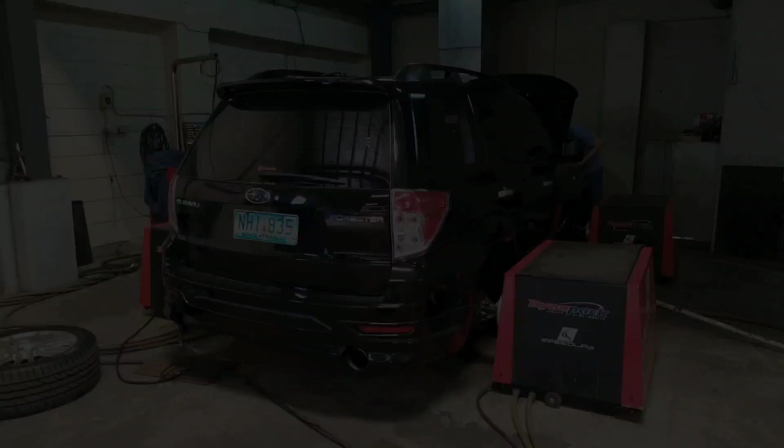We have a 2011 Forester Turbo who came in to change his turbo because his stock turbo has the blades chipped already, so he managed to find a VF52, which is from what we believe is a WRX of the same vintage. And it is a bolt-on for this engine.

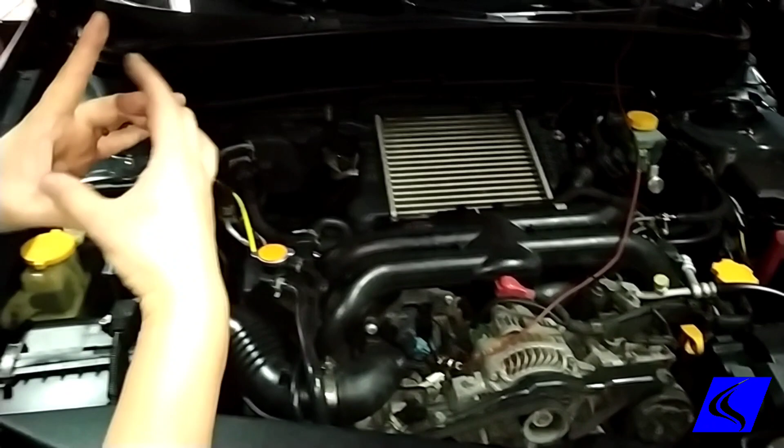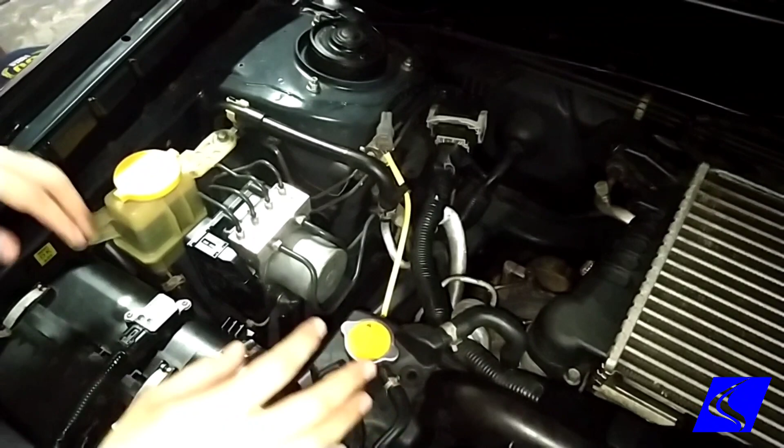Difference between his stock turbo and the VF52 is that the inlet is a little bit bigger, so it flows in more air. And despite it being a complete bolt-on, and yes, the car will run, it will work, but it's gonna be number one, too lean, and number two, tuning is all wrong because the stock computer doesn't know what to do with the extra air anymore.

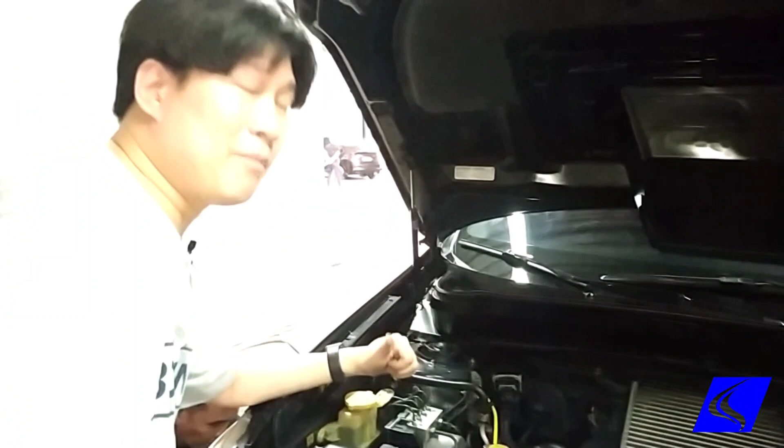This already has a full exhaust from us. I believe there's a K&N drop-in here, and then we're about to install a Unichip to be able to correct the air-fuel ratio. One of the primary reasons why we went with a Unichip is because it is a 10-year-old car. I don't think we'll be keeping it for the next 5 years even.

So when he does sell the car off, we can remove the Unichip, we can remove the exhaust, put everything back to stock, and then he can reuse the Unichip for his next car, whether it's gas or diesel. The wiring diagram for the Unichip, this is the pin-out sockets that we need for the Subaru, which we get from the Unichip website, which only us Unichip dealers have access to. And this is the plug side of the Unichip.

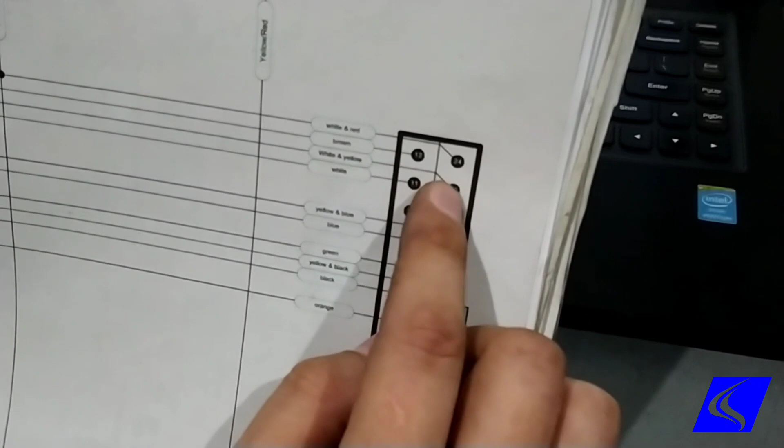A brief explanation of what these wires are. These first two are power and ground. These two are MAF sensor in and out. So this basically controls how much fuel we're gonna add. This next one is ignition timing, so plus minus, advance or retard ignition. This is the ground for the crank sensor, and this is for the throttle position, 0 to 5 volts, and this is another ground for the throttle position.

So we need a reference signal. So basically the start when it says power and ground is 0 to 12 volts. The Unichip needs power to operate. These two are terminated for the mass airflow. This one we adjust the voltage to tell the computer that hey, there's more air, so add more fuel, or there's less air, add less fuel. It's all done through voltage.

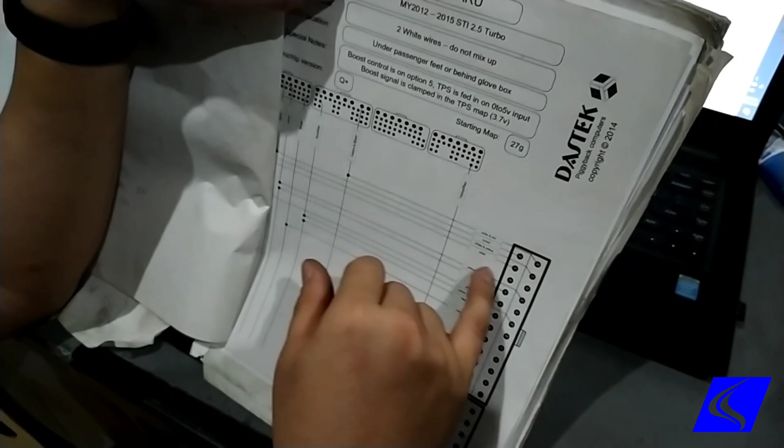Same thing with the ignition timing here. There's a wire here from the ECU that goes in here that goes out there. So say this is 2 volts, goes to the Unichip, gets modified, gets thrown out as 2.5 volts. This controls ignition timing. And then same thing with this one for the throttle position. We need to know what is RPM as far as the car is concerned. That's going to reference everything else. So we need to know what idle is, 3000 RPM, 6000 RPM.

So it's only about 10 wires. It's not exactly very hard to install. And if you happen to be an electrical engineer or know somebody who knows how to read a wiring diagram, this should be pretty easy to install for you. So we're gonna go ahead and install the Unichip now on the car, which is the glove compartment behind the carpet, which is in stark contrast to what we see in most cars now, which is located under the hood.

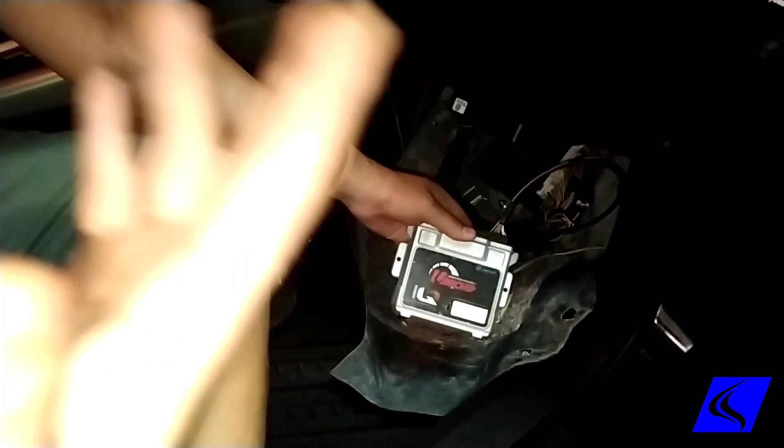Here's the Unichip. This is where it's installed. On Subarus, it's still kind of nice because the ECU is still here inside the car, as opposed to most cars, where it's there in the engine bay. This is the ECU right here. And these are the wires that connect the Unichip to the wiring harness here. We don't touch this part. This part is completely stock.

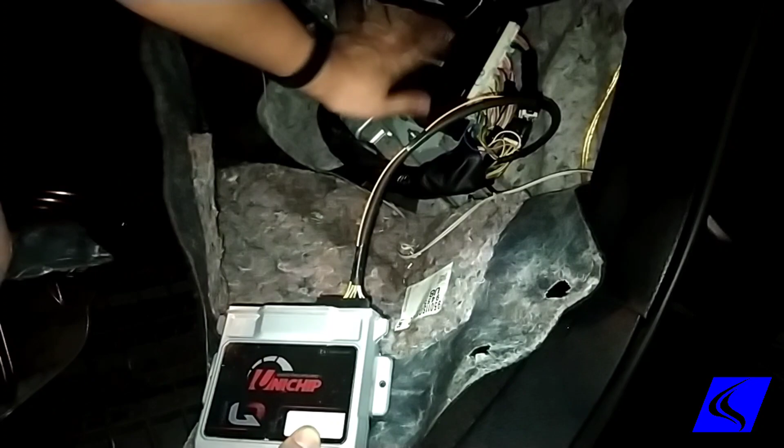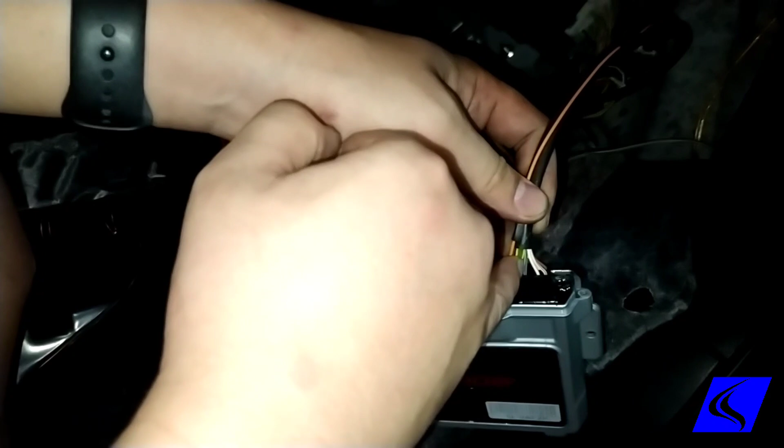And it takes about 8 wires to connect the Unichip. So we have power, ground, then we have here, this should be air fuel, this should be ignition, and this should be throttle right there. So we can get an RPM signal.

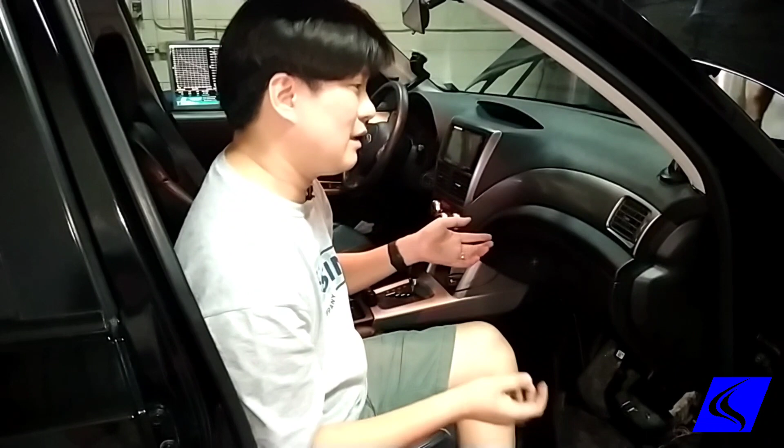We opted with just the Unichip Q here because all he wanted was to get the turbo to run correctly and then obviously to be safe and maximized. So we did not opt for boost control anymore. We did not opt for throttle control. And we're going to be dynoing this car in a while to see how much power we make. We are keeping the boost stock. I think the stock boost, if I remember correctly, is about 15.5 psi on this vintage Forester, which we will see on the dyno later.

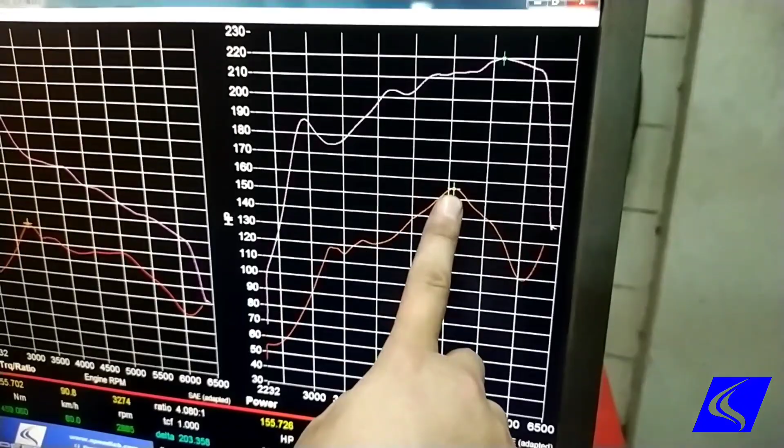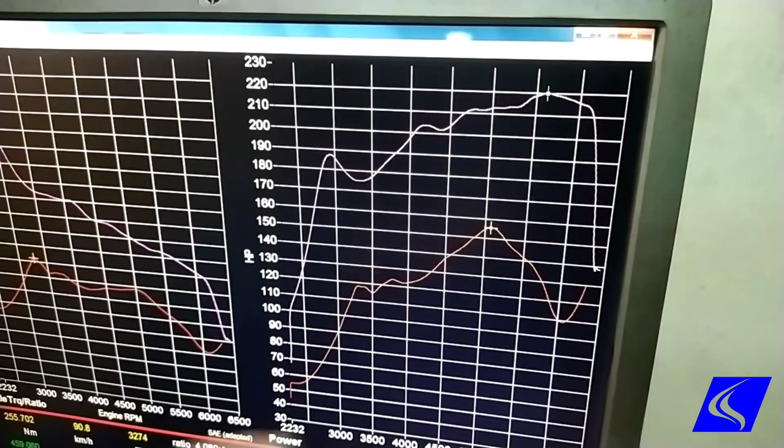Okay, we're done tuning this 2011 Forester Turbo, and this is what we got. This is the baseline when it came in. This actually has the turbo changed already to a VF52 because his old turbo has the blades chipped. So this is 155, which is pretty much what a stock Forester makes. And then after tuning, we got 220. For all intents and purposes, it's a 70 horsepower gain.

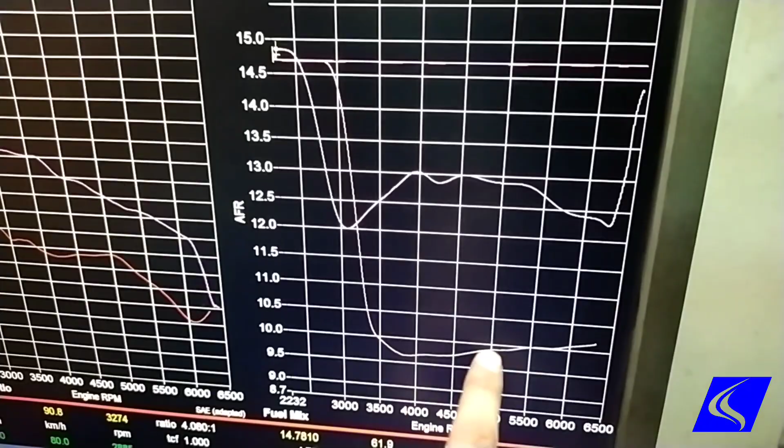That's primarily because of the bigger turbo, and then with the big turbo, what happened was it was very, very rich. It's too rich actually. 9.5 AF, that's really too rich for this one. It's because the stock ECU is not calibrated for that size of turbo. That's why we needed to install the Unichip to get the air-fuel ratio correct, which is what we want on turbo cars, this range.

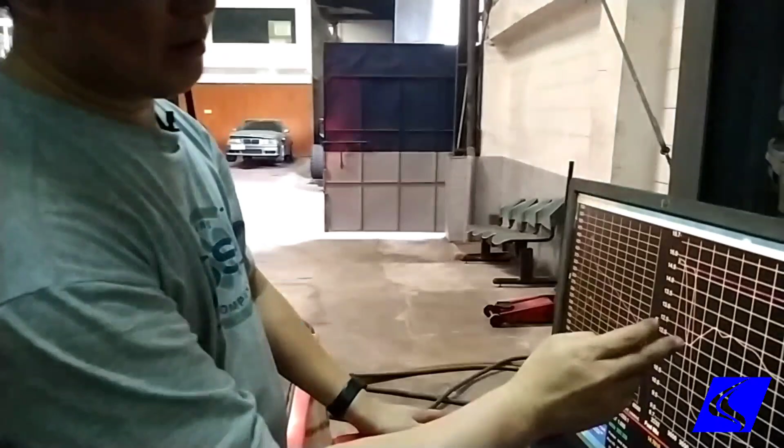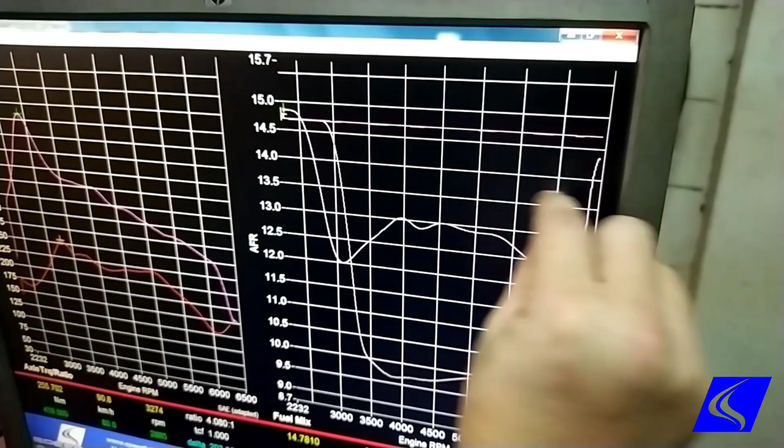12 to about 13 AF ratio. So this is what turbo cars should make, as opposed to non-turbo cars where the AF ratio is going to be here. That's too lean if your car is turbocharged. And torque here is from 250 to 450. You'll definitely feel the kick on this one. Okay, we're going to take it out for a test drive and see what happens.

Okay, that's unexpected. Kinda love that sudden kick when it hits full boost at around 3.5. Throttle response has definitely improved a lot. I would actually do Unichip Q4 on this car because there's still some throttle delay from 1.5 to about 2,000 before boost kicks in, but overall you don't have to step on the pedal as much now with the added response. Not bad. But here, we'll try out the boost again.

That feels really nice. Boost is good. Okay. And just for reference, a stock Forester Turbo XT like this one makes around 155, 160 in stock trim, and then with the stock turbo and you tune it, we normally see around 25, 30 horses gain, so a sub 200 horsepower car. But since this one already has an upgraded turbo and then we tuned it, it's at 220. It's not very far already from what an STI does.